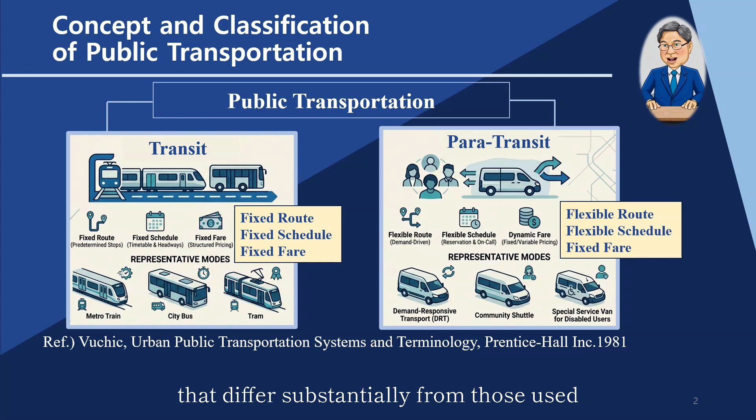In this lecture, we will focus specifically on transit assignment. Because transit systems operate with fixed routes and fixed schedules, waiting time and transfers become major components of travel impedance that influence route choice. Consequently, transit assignment requires analytical concepts and modeling approaches that differ substantially from those used for highway traffic assignment. Transit assignment requires a much more complex analytical framework than highway traffic assignment.

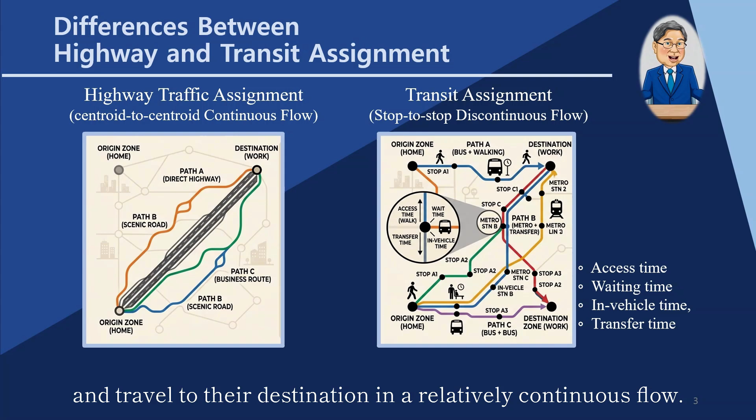The primary reason is that it must explicitly account for additional components of travel impedance, including access time, waiting time, and transfers. Let us first consider highway traffic assignment. Travelers can depart whenever they choose and travel to their destination in a relatively continuous flow. Transit travel, however, is fundamentally different. In addition to the access time required to reach a transit stop, passengers must endure a discontinuous process, including waiting for a vehicle to arrive.

Waiting time involves not only the physical time spent waiting, but also the psychological burden associated with the uncertainty of vehicle arrivals. Furthermore, when no direct service is available, passengers must make one or more transfers. Transfers involve additional walking and waiting, resulting in both time losses and psychological inconvenience.

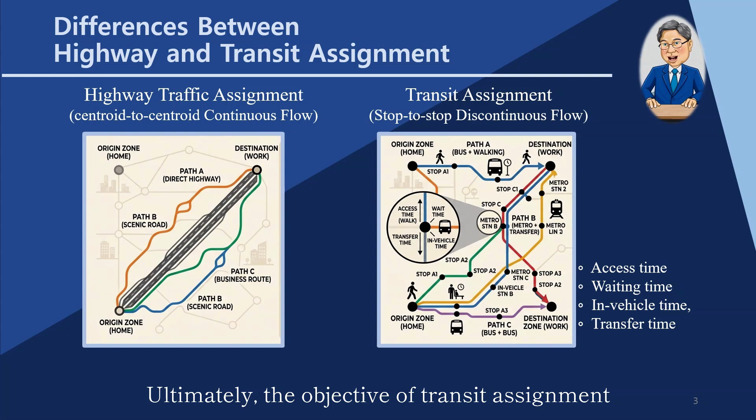Consequently, transit assignment must consider not only in-vehicle travel time, but also access time, waiting time, transfer time, and the various forms of disutility associated with these components. These elements are converted into a common measure of utility and are represented by a single integrated indicator known as generalized cost. Ultimately, the objective of transit assignment is to model travelers' route choice behavior based on generalized cost and to reproduce actual transit travel behavior, including waiting and transfers, as realistically as possible.

To perform transit assignment, it is essential to first construct an accurate transit network as the fundamental input. In Lecture 2, we discussed the components of a transit network in detail. Here, we will briefly review only those elements that are directly related to transit assignment. A transit network is constructed by overlaying transit-specific information, such as nodes, routes, and segments, on the underlying highway network.

Transit nodes contain not only geographic coordinates, but also various service-related attributes, including access time, waiting time, and transfer time. An important consideration during data entry is to clearly distinguish between manually input values and those calculated automatically by the software.

Transfer time typically comprises the walking time between stops and the waiting time for the next vehicle. However, in most commercial travel demand software, the average waiting time is calculated automatically from the service headway. Therefore, to prevent double counting, only the pure walking time between stops is usually entered into the transfer field. Additionally, a transfer penalty is typically added to reflect the perceived disutility associated with the act of transferring.

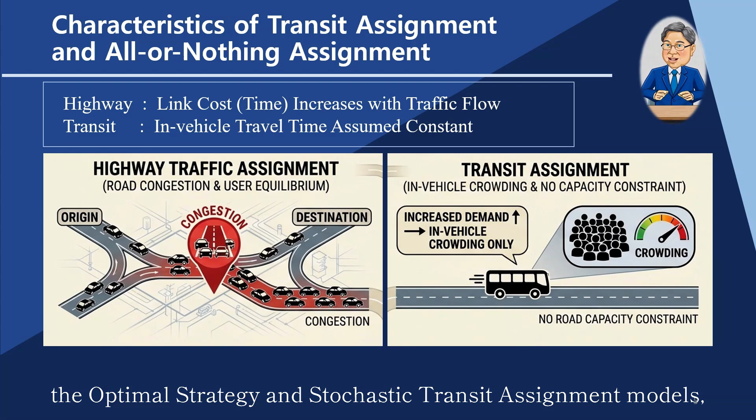In reality, travelers heading to the same destination often choose different routes depending on waiting time, transfer convenience, and individual preferences. Therefore, while the all-or-nothing assignment can be appropriate for simple transit networks with few alternative routes, it cannot adequately represent traveler route choice behavior in complex urban transit systems with multiple route and transfer options. These limitations motivated the development of the optimal strategy and stochastic transit assignment models, which provide more realistic representations of passenger route choice behavior in transit networks.

The all-or-nothing assignment method discussed earlier has an important limitation. It cannot adequately represent passengers' actual boarding behavior when multiple transit routes serve the same stop, nor can it properly account for the average waiting time associated with service headways. To overcome these limitations, Spiess and Florian proposed the optimal strategy model in 1989.

The optimal strategy model assumes that passengers do not wait for only one specific route. Instead, they choose a strategy consisting of several attractive routes. The set of routes that minimizes the expected total travel time to the destination by considering both the expected travel time and the service headway of each route is called the attractive set. Passengers are then assumed to board the first vehicle that arrives among the routes included in this set. The algorithm calculates the arrival probability of each route from its service headway and distributes passenger demand among the routes in the attractive set in proportion to those probabilities.

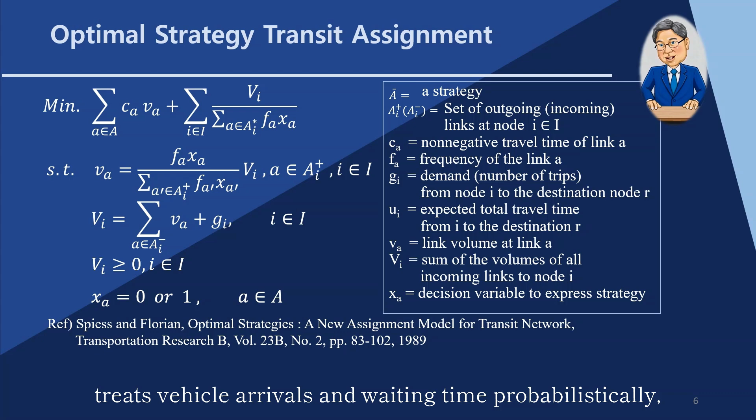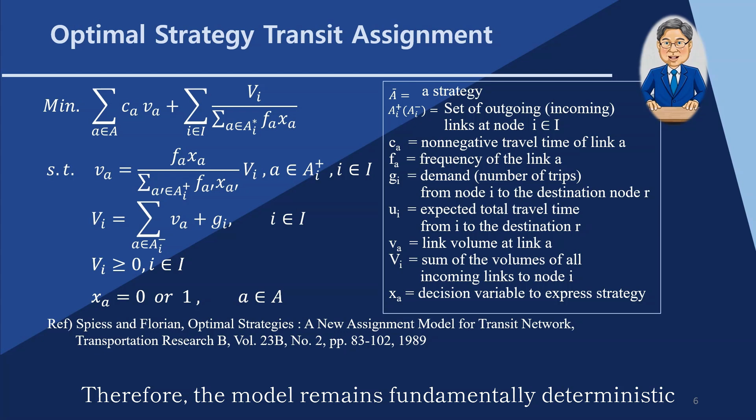One important point should be emphasized. Although the optimal strategy model treats vehicle arrivals and waiting time probabilistically, it is not classified as a stochastic route choice model. It considers only the physical uncertainty associated with vehicle arrivals and service headways. It does not represent behavioral uncertainty, such as travelers' preferences or perception errors. Therefore, the model remains fundamentally deterministic and shares the general limitations associated with deterministic approaches.

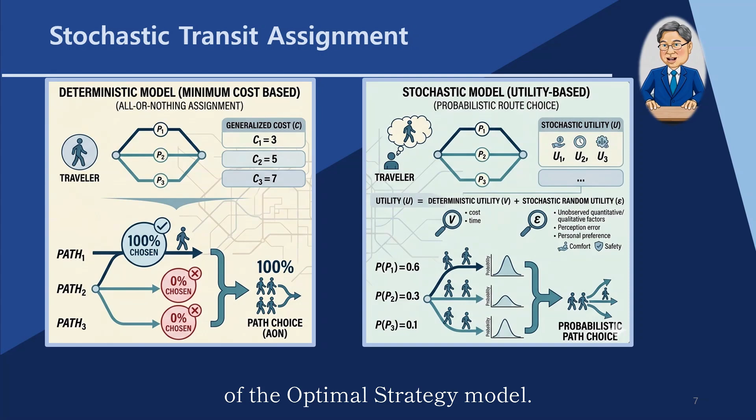Stochastic transit assignment was developed to overcome the deterministic assumptions of the optimal strategy model. Rather than assuming that all travelers make identical decisions, stochastic models represent unobservable factors, such as travelers' preferences, levels of information, and imperfect knowledge of the transit network through the concept of random utility, thereby providing a more realistic representation of route choice behavior. The most widely used approach in practice is the logit-based model.

Logit models are based on the independence of irrelevant alternatives assumption, which states that the random error terms associated with different alternatives are mutually independent. In highway traffic assignment, overlapping routes create correlations among these error terms, leading to the well-known path overlap problem. To alleviate this limitation, extended models such as C-logit and path size logit have been developed.

Unlike highway assignment, transit assignment is generally based on transit routes rather than individual highway links. As a result, the path overlap problem is often less severe than in highway networks. However, when multiple transit routes share long common segments, or when alternative routes are highly similar, the limitations of the IIA assumption may still become significant. In such cases, applying correction models such as C-logit or path size logit is desirable.

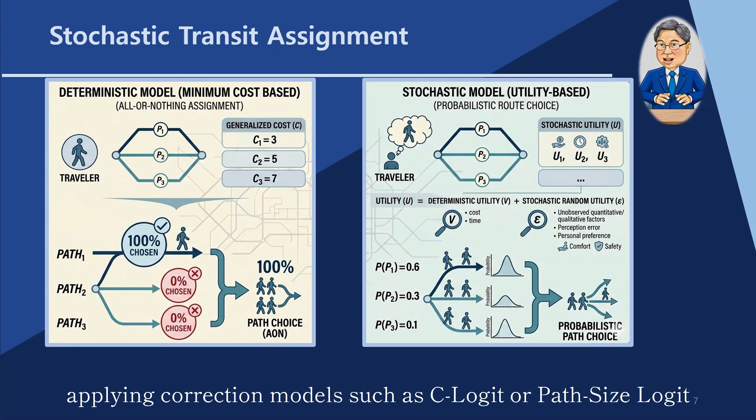Nevertheless, because of its computational efficiency and ease of implementation, the standard multinomial logit model remains the most widely used approach in practical applications. Another important challenge in logit-based modeling is constructing a realistic choice set consisting of the alternative routes that travelers are actually likely to consider. Including too many alternatives may introduce unrealistic paths and reduce the behavioral realism of the model, whereas including too few alternatives may fail to capture actual route choice behavior. Consequently, constructing an appropriate choice set remains one of the most important practical issues. Modern transportation software typically uses k-shortest path algorithms to generate behaviorally realistic alternative routes for route choice analysis.

In summary, stochastic transit assignment uses logit-based models to represent travelers' perceptual uncertainty and behavioral diversity, thereby providing a more realistic description of route choice behavior. Consequently, the optimal strategy model is generally efficient for relatively simple transit networks, where service headways and average waiting time are the primary sources of uncertainty. In contrast, stochastic transit assignment is more appropriate for complex transit networks, where travelers' preferences and behavioral uncertainty play a more important role.

The optimal strategy model and stochastic transit assignment discussed earlier are both frequency-based models, meaning that they use service headways rather than the actual departure times of individual vehicles. Consequently, they cannot explicitly represent timetable information or capture time-dependent travel decisions. For example, travelers may choose to wait for a vehicle that departs later if it enables them to reach their destination earlier, rather than simply boarding the first vehicle that arrives. To represent this type of behavior, schedule-based transit assignment was developed.

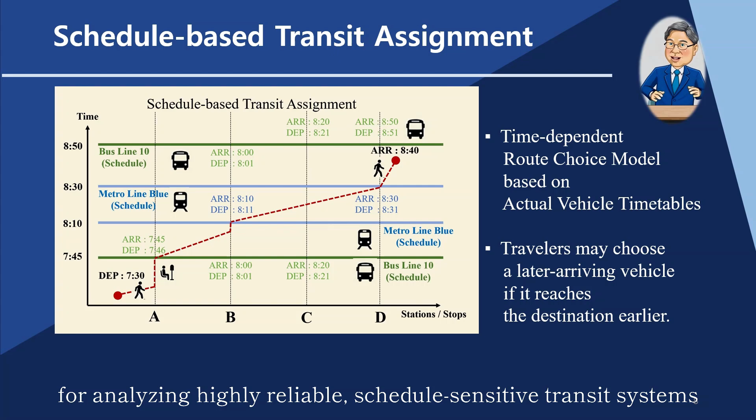Nevertheless, major transportation planning software packages have continued to enhance their schedule-based transit assignment capabilities. These models are particularly valuable for analyzing highly reliable, schedule-sensitive transit systems, such as railways and express bus services, as well as travelers' route choice behavior under real-time transit information. The all-or-nothing and static assignment models discussed earlier are all explicitly formulated mathematical optimization models.

Because these models satisfy mathematical properties such as the convexity of the objective function and guarantee a unique solution, they provide objective and consistent analytical results whenever the same input data are used.

In contrast, real-world transportation systems are inherently dynamic and often too complex to be represented completely by mathematical equations alone. In such situations, simulation is widely used to reproduce real-world traffic phenomena as realistically as possible, rather than to derive an analytical optimum. Instead of solving a single mathematical equation, simulation defines behavioral rules for travelers and vehicles and repeatedly executes those rules to simulate how the state of a transportation system evolves over time. In this sense, simulation is fundamentally a rule-based analytical approach.

To better understand the concept of simulation, consider the problem of estimating the area of a geometric shape. The area of a regular shape, such as a rectangle or a circle, can be calculated exactly using mathematical formulas. However, the area of an irregular shape cannot easily be determined by a single equation.

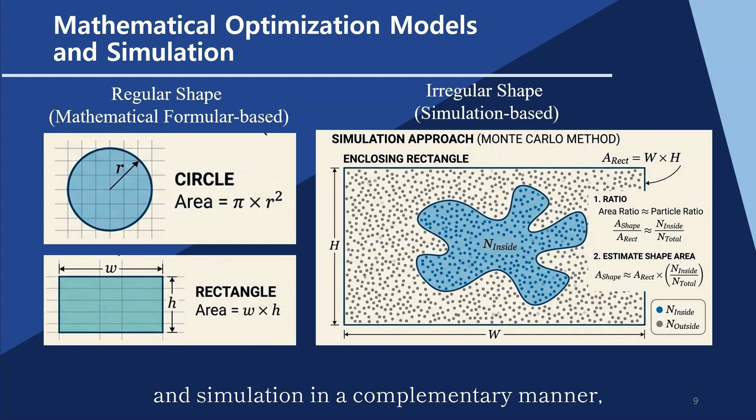Recently, rapid advances in computing power, mobile big data, and artificial intelligence have made it possible to analyze transportation systems with a level of realism that was previously unattainable. Looking ahead, transportation analysis is expected to increasingly combine mathematical optimization models and simulation in a complementary manner, providing more realistic analyses and supporting more scientific and data-driven transportation decision-making.

Recent advances in smart card data and mobile location data have brought transit analysis into a new era. In the past, travel behavior had to be estimated from relatively limited travel surveys. Today, however, passive mobility data, which are collected automatically without requiring any response from travelers, enable analysts to observe actual transfer locations and route choice behavior for nearly the entire population. These large-scale datasets are expected to advance transit assignment in two major directions.

The first is the refinement of stochastic transit assignment models. Large volumes of observed travel data now make it possible to calibrate the utility functions of logit-based models with much greater precision. As a result, travelers' sensitivities to waiting time, transfer time, and in-vehicle crowding can be estimated more accurately, significantly narrowing the gap between analytical model predictions and actual travel behavior.

The second is the advancement of AI and agent-based simulation. By learning from massive behavioral datasets, AI can identify complex decision-making patterns that are difficult to represent using conventional analytical models. This enables more realistic simulations of individual traveler responses under conditions such as major public events or unexpected system disruptions.